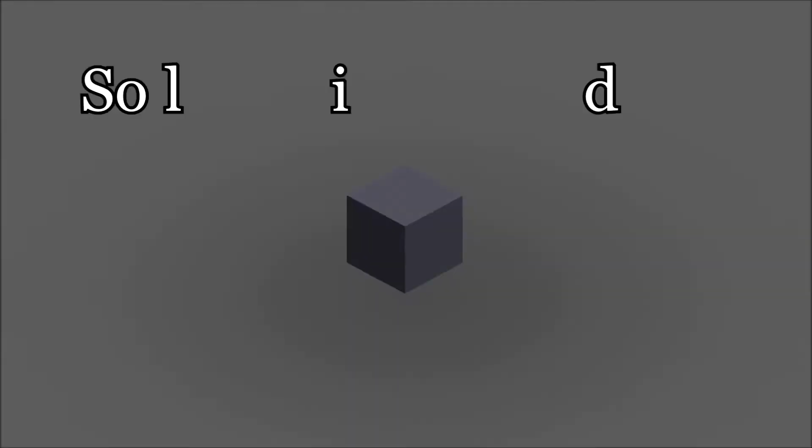In this lab exercise, you'll be creating an in-context part using Solidworks. You'll be creating the part shown in red, calling it the carriage. One interesting takeaway is that most of the dimensions, not all, but most, are the relation between parts. So you'll be converting entities, holes, locations, sizes, and so on between parts. All told, maybe there are a half a dozen dimensions you'll type in as numbers as we go along. There are two documents you'll want to refer to.

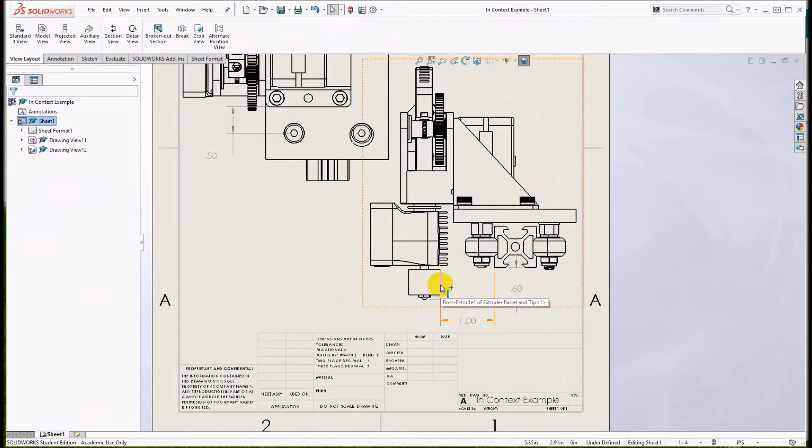One is the drawing that shows three of the relevant dimensions, with an end view. This depicts how far it is from the nozzle to the underside of the V-rail, and from the inside edge of the hot end to the front of the V-rail. Those are two of the dimensions. A couple of other dimensions are the distance from the edge of the mounting plate for the Titan extruder to the center point of these two rollers and the other pair of rollers on the bottom.

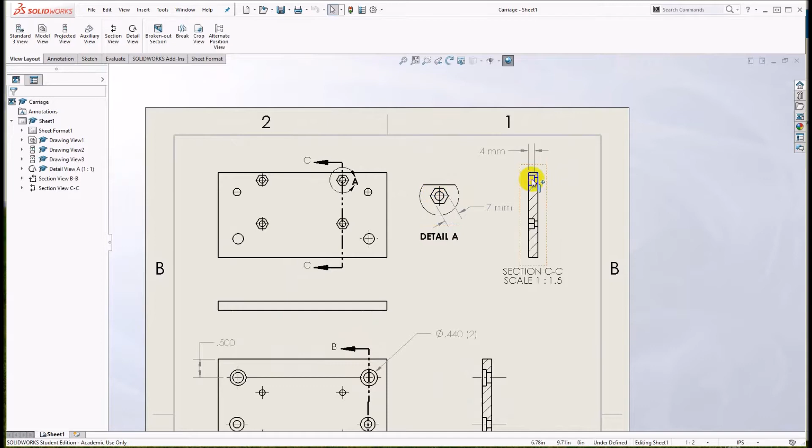So that's one document. The other document you'll want to refer to depicts some of the specifics of the carriage. Notice most of the dimensions are not here, but you do need a few, particularly when defining recesses for nuts. They're shown here, how deep they are, what the flat-to-flat dimension is. For the holes themselves, you'll want clearance around your hardware and to define the distance to the edge of the part you'll be creating, because those aren't really related specifically to any feature in the assembly.

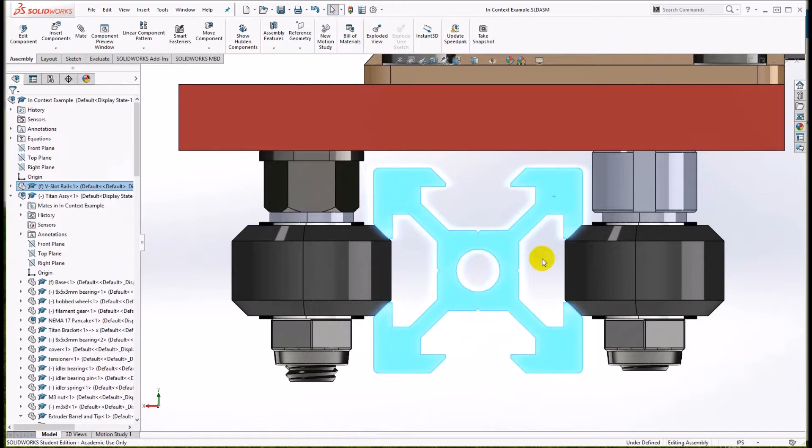So let's go back to the assembly and take a look at it. Just for introduction, you can see the rollers are quite well engaged in the V. I'll go to an end view so you can see it clearly, and here the rollers are tangent to and aligned with the V-rail or V-slot rail. In addition, the way this assembly is put together, the carriage is mobile, so you can move it back and forth, giving you a sense of, once you start developing your 3D printer, how things might interfere, where you can attach belts and the other parts. You'll find this to be a powerful way to move your design much further down the road.

Anyway, let's get started. I'm going to start with a brand new assembly, bring in many of these parts that are already pre-modeled for you. So your task, as I mentioned, is to create the carriage based on those other parts and the few dimensions that have been provided.

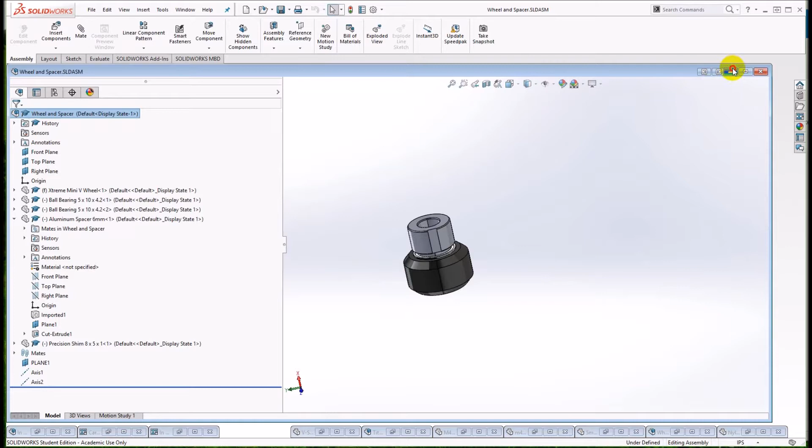As we get started, notice I have all of the relevant parts open, minimized down below. For instance, if I want to look at one of the parts, here's one of the wheels with spacers. I have everything open along the bottom, and the reason is it makes it easier later when inserting elements into my assembly to have them already present. I don't have to go hunting for them. So I'll do a File, New, Assembly, and OK.

The first part you put into an assembly is fixed in location. I think I'd like the V-slot rail to be that part. I'll place one of them there. Now we're ready to start adding things to it. The first thing I'll add is the extruder, the Titan assembly. Here it is, comes in just a random orientation, something we need to fix. Notice this part is movable, the other one is not, it's fixed in location. Let's start to relate the two together, and your guide for that is the documents that I provided.

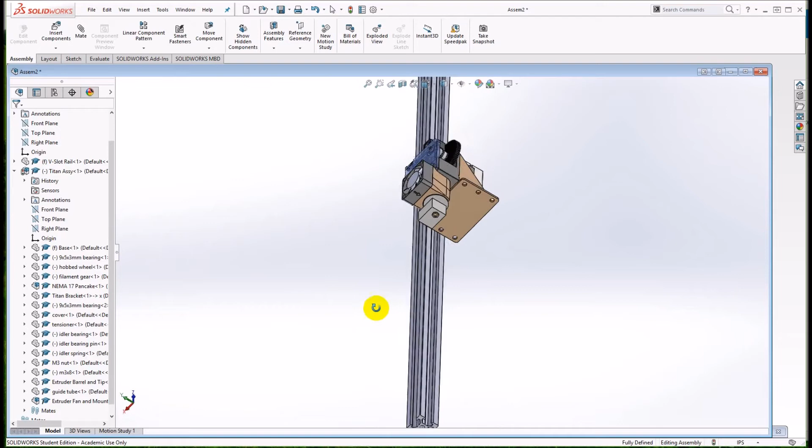For example, let's look at the in-context example sheet, and this shows a few of the key dimensions you'll need to use: 0.6 inches from the bottom of the V-rail to the tip of the extruder nozzle, and 1 inch from the inside edge or surface of the hot end to the front of the rail. So let's do that first.

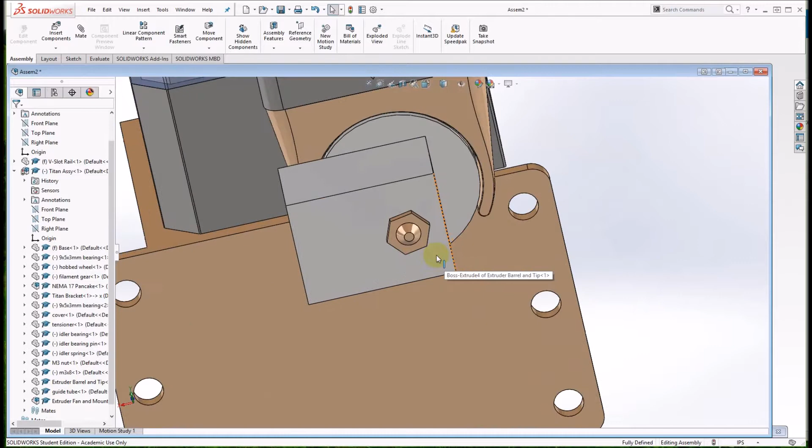Go back to my new assembly, I've got to find it here because I have quite a few things open. Alright, here we are, let's do the nozzle first. You can do it in any order you like. So I'll go up to Mate, click on the tip there. Let's define this as the bottom, so we'll align the two of them. They're backwards, so let's flip it around. What we want is for it to be 0.6 inches down. Right now it's 3 and change down from where it started out initially.

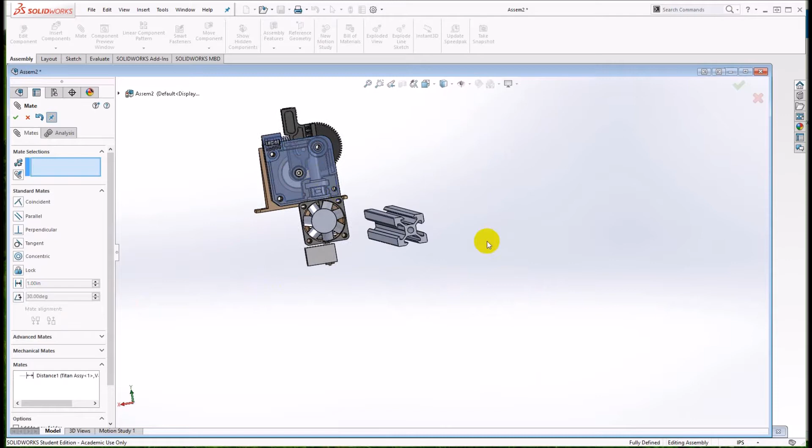I'll make it 0.6 inches. Sometimes when you are changing your flipping or adding the offset, it tries to readjust, so you'll have to be aware of that. Okay, I'll accept that change because that's one of the first things. And I'll move it manually such that it's roughly in the location I want it to be. Oops, let me hit my F. Things got a little spaced out there. Hit F again. Alright, so I'm back.

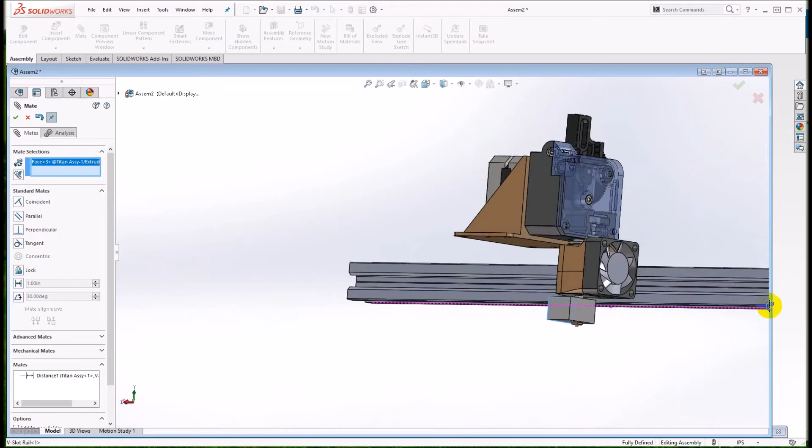So now I've actually achieved a fair bit right there. Now the extruder, the entire Titan assembly, is oriented such, and you'll see you can even move it. I mean, it acts as if it's a carriage already. Those two simple mates have already done a great deal of the work for us. So now we're ready to start adding the wheels and the other bits of hardware that will follow the constraints that I've just created.

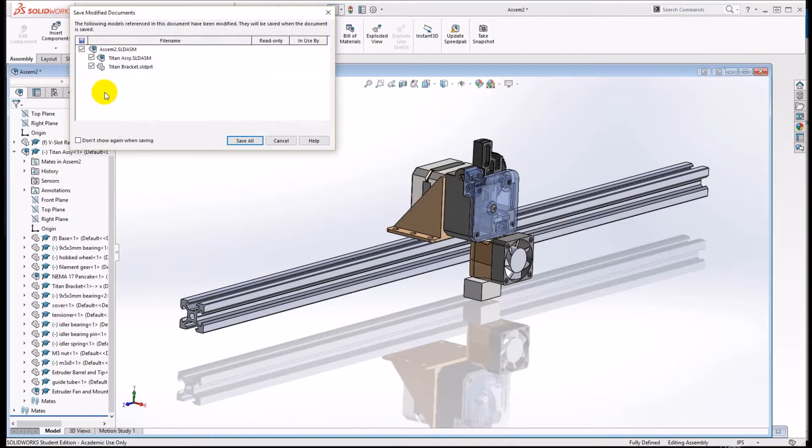Before we proceed any further, it's important for you to know that you have to save the assembly before you create any in-context features or relations. Otherwise, later on, when you do try to save the assembly, you will end up breaking those features. So let's go ahead and do a file save right now. I'll save it under a name, say for example in context 2.sldasm. So once having saved it, now it's safe to create in-context features, knowing that the assembly through which they relate to each other is stable and has a name that they can refer to.

Now that we've saved our assembly, let's start adding some of the parts that will become important as we move along. The first parts we'll add are the rollers or the wheels. We do an insert component. Let's find them down on the list here. There are 2 with the spacers and 2 with eccentrics. I will use the push pin to allow me to add more than 1 of each. So I'll click on the push pin, then we'll do 2 of the wheel and spacer, 1, 2, right click to finish. Same thing for the wheel with eccentrics. Click on it, push pin, 1, 2, right click to finish.

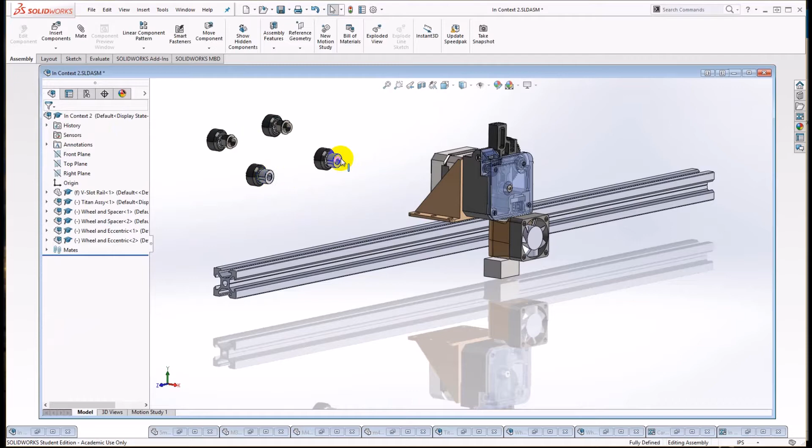Let's now turn on the visibility of planes so that we can see how things can get aligned to each other. The first task is to align the wheels to the rail. So we'll go to visibility, turn on plane visibility. Now you can see the various reference planes that I've created that will help us to align the wheels to the rail. Let's do the spacer wheels first. Get the orientation of the view just right. Okay, we'll go to Mate. Notice nothing is selected yet. Click on the plane of one of the wheels, the plane of the V-rail. That orients it. We'll accept that. Do the same thing with the second wheel.

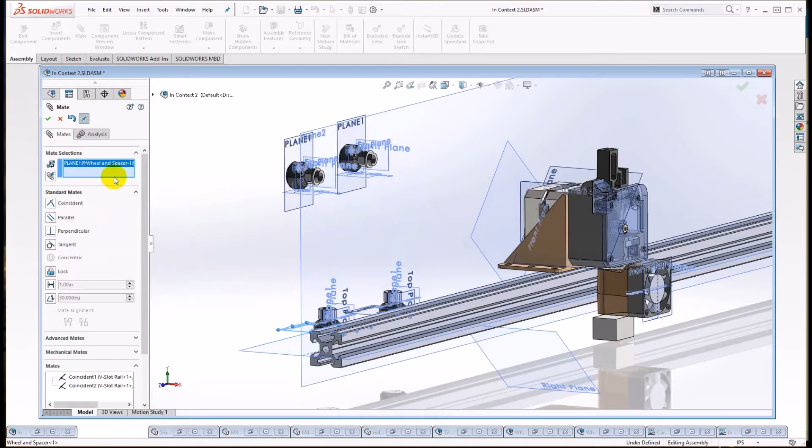Okay, they're good. Now they're on the wrong side of the rail. Let's move them over. I don't want to do that. Let's zoom in a little bit and select the wheel, move it through, move the other one through. Now they're in the right plane, but they're not touching the rail. Let's fix that. I'll find the V, the male V part of the roller, and mate it tangentially with the rail, like that. Do the same thing with the second roller. Let's get the right surface here. There we go. Accept it.

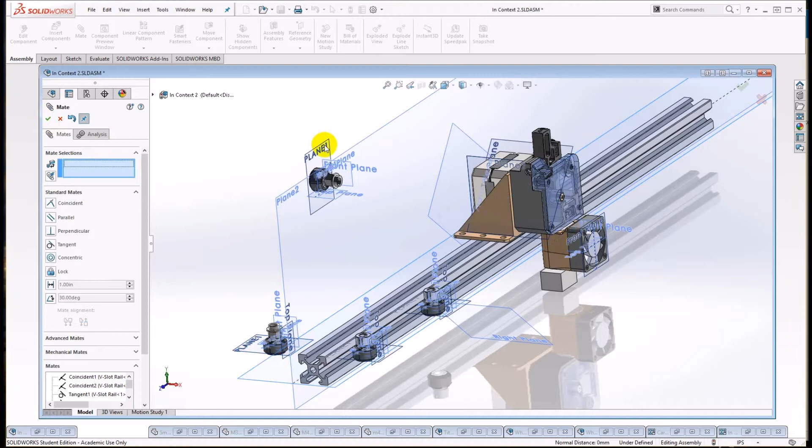Now we'll repeat those operations with the eccentric wheels. The plane of the wheel, the plane of the rail. Accept it. Second wheel, rail. Accept that. And again, to a tangential mate of the V with the V. Bring it in. Let's get this guy, zoom in a little bit. This surface, let's clean this up. I think I forgot to accept that one. Let's finish that. And we'll do this one to the V-rail. Don't forget to accept it as I did a moment ago.

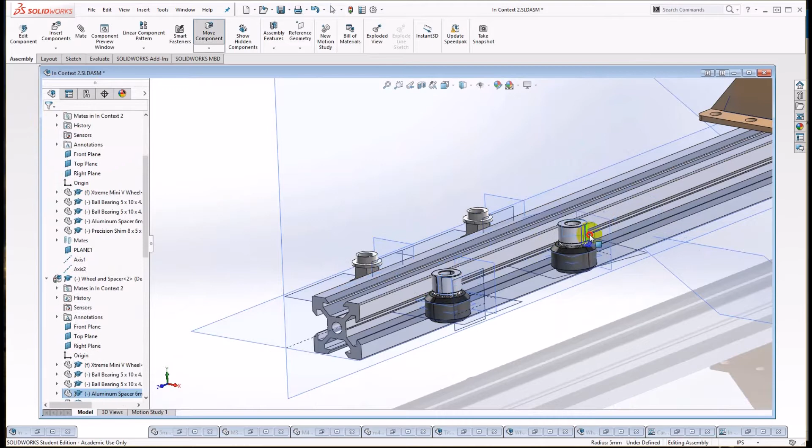Alright, so now all the rollers are properly mated with the V-rail. We'll have to do a little bit of extra work with the eccentrics in just a moment, but you'll notice that I can now move the rollers, all four of them, and they work. They'll rotate a little bit, but they stay properly tangential. In fact, if I look at the end view of the rail itself, let me see where I can select that.

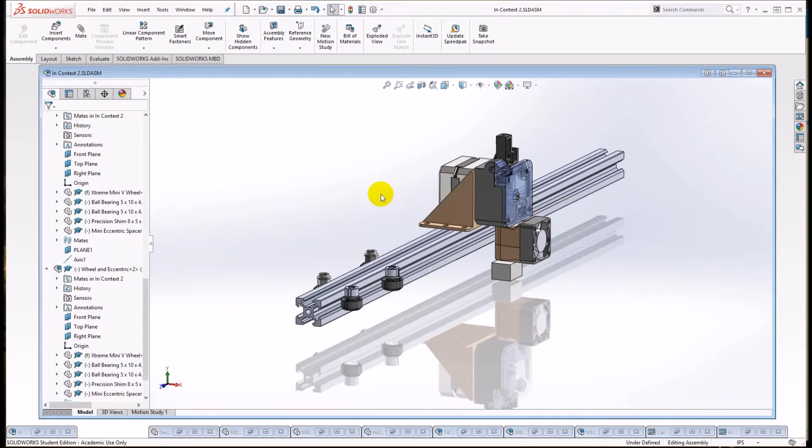There we go. We'll look at the end view and zoom in a little bit. You can see how nicely the rollers are now nestled into the V-grooves of the rail. This is good. Now we're ready to start defining the carriage itself. Let's turn off the plane visibility and once again save our assembly. We're going to rebuild and save, and now we know that there's no chance that we can lose the work that we've just done.

Now that the wheels are oriented to the V-grooves, let's align them according to our document to the carriage, to the bracket for the Titan extruder. Going back to our drawing, let's take a look here and see what the dimensioning is. This shows in the upper left view here, let me make it a little bit bigger, that the center of the rollers is to be a ½ inch from either side of the Titan bracket.

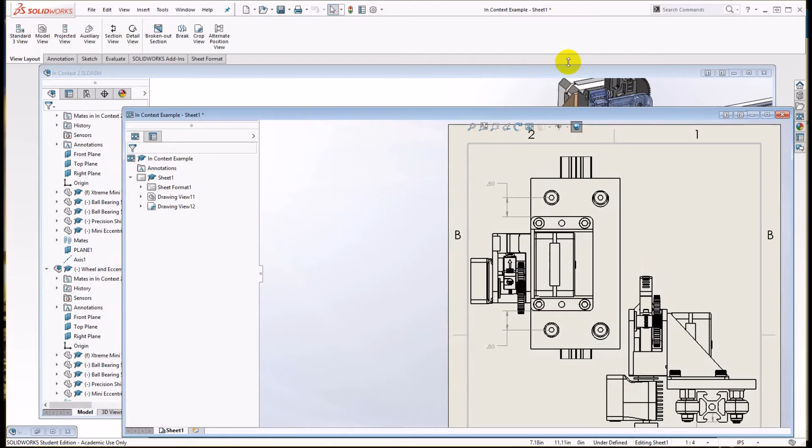So let's do that, in fact, in the assembly. We'll move things approximately to where they belong. That will help in a moment. Rotate the view around, do the same thing on the back. Get this oriented better. And I'm just kind of moving them lazily to a location that would help the job. Zoom in a little bit.

Now, as before, when we were looking at planes, we can also turn on visibility of the axes, and we can use those axes as dimensions from the edge of this bracket. So let's do that. We'll mate the axis with the surface, and we'll give it an offset of a ½ inch, 0.5, which is what was specified in the document. We'll accept that. Do the same thing for the other in the back.

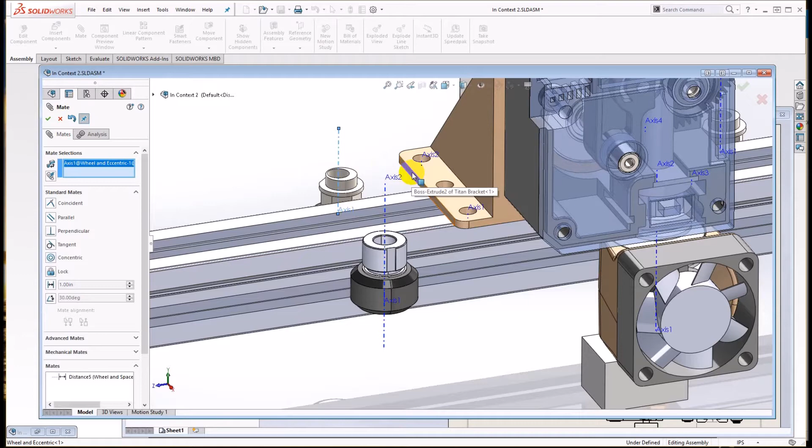½ inch. Now, for those more practiced in Solidworks, you can actually create a global variable and have it relate automatically. That would allow you to change that dimension and have it affect all four wheels at the same time. We're not doing that in this example. So here again, that to here, an offset of 0.5, accept it, and here to here.

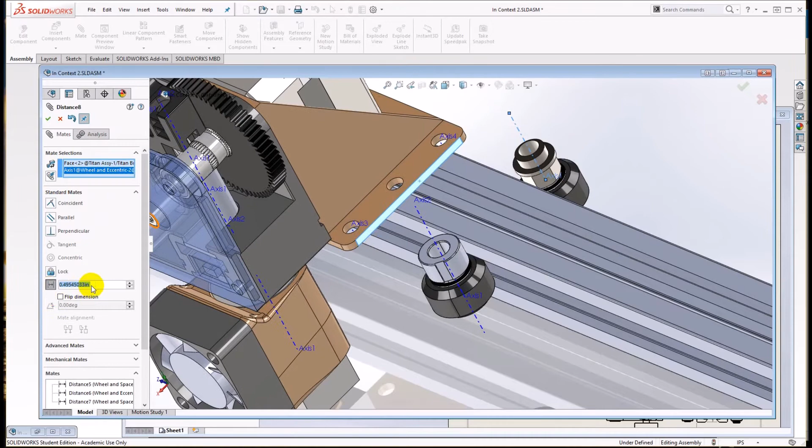Let's get the clear selection, got to get it right. Axis to the surface. Oh, I see, it's selecting the axis there. Alright, clear it out. I'm leaving this in the video because it's the kind of thing you'll fight with occasionally. When I was clicking here, it was trying to select that axis. Let's get away from that axis. Here to here. Make them coincident, and then offset by a ½ inch, 0.5. Okay. Now we're correctly oriented.

Sometimes it's valuable to be able to understand why Solidworks isn't doing what you want. This was a good example. We'll accept that. And now when I'm finished with this, as I move the entire assembly, notice that the wheels travel along with it. I mentioned earlier that I want the eccentrics to be oriented in a particular way. And let's study for a minute. I'll turn off the axis view.

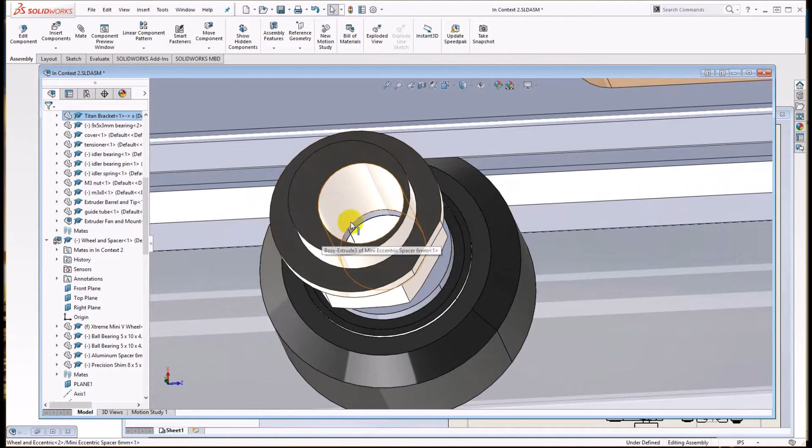Let's study the eccentric and notice that the lobe, if you will, the eccentricity is oriented away from that flat. So the extreme eccentric property is the furthest from this particular flat. And what I'd like to do is have the carriage that we're going to design in just a moment be such that the two eccentrics are halfway through their travel. So if I turn it in one direction, I'm moving away from the rail, and toward the rail in the other direction, and equally for both wheels.

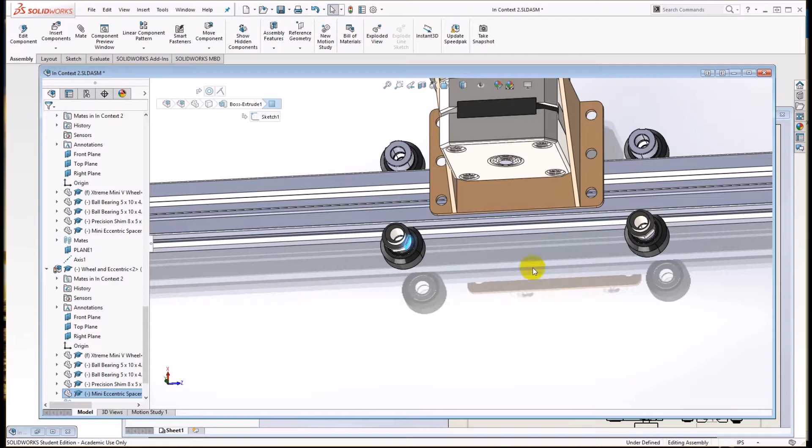So let's do some alignment of these flats to the rail, and that will ensure that my carriage, once I create it, will have that property. I'm going to click away from everything, clear them out, and then go into a fresh mate, and I'm going to mate that flat with the surface of the rail. Initially it tries to do it parallel, which is not what I want. I want to have equal up and down adjustment, so I'll make it perpendicular. That's just right. Now if I were to turn the eccentric one way, it moves the wheel away, and the other way it moves it closer.

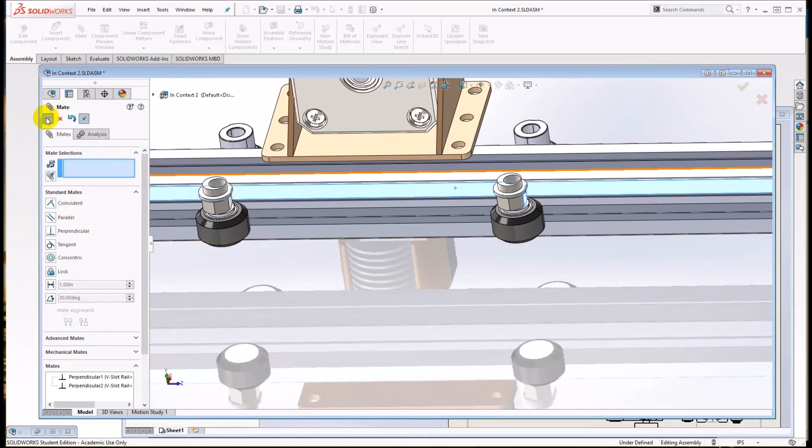Let's do the same thing for the other. Again, choosing the correct flat, I'll choose this guy here. And again, the face of the rail, let's get the right face here. Starts off parallel, we'll make it perpendicular. And now the wheels are not only spaced as one would want, as per the document, from the bracket of the extruder, they're oriented such that I get the best advantage of the behavior of the eccentric. So the next step is finally we're going to start creating the carriage.

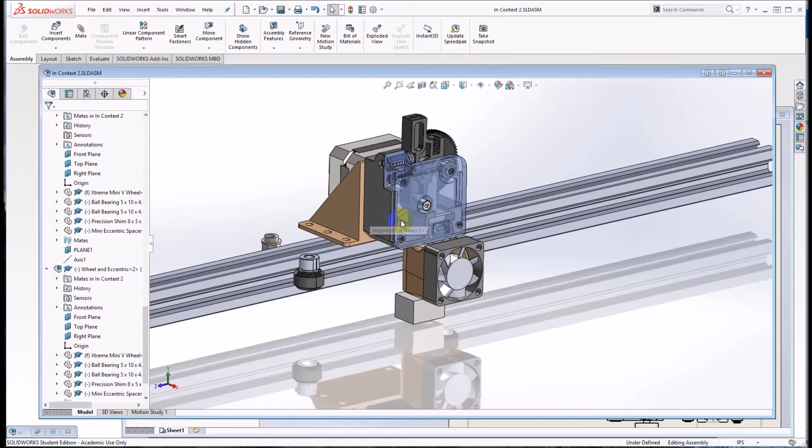Alright, before we proceed any further, let's do another file save to preserve what we've done. Now let's fast forward and start to create the carriage, the reason we're here. Point one thing out, I want you to look briefly at the parts that the carriage will be mating to.

They'll be supported on the bottom by the flat surface here, the top here on each of the kinds of rollers, and the top of this carriage plate will be just underneath the underside of the mounting plate for the extruder. So those are my constraints. Let's start with a simple part that will mate up with all of those features.

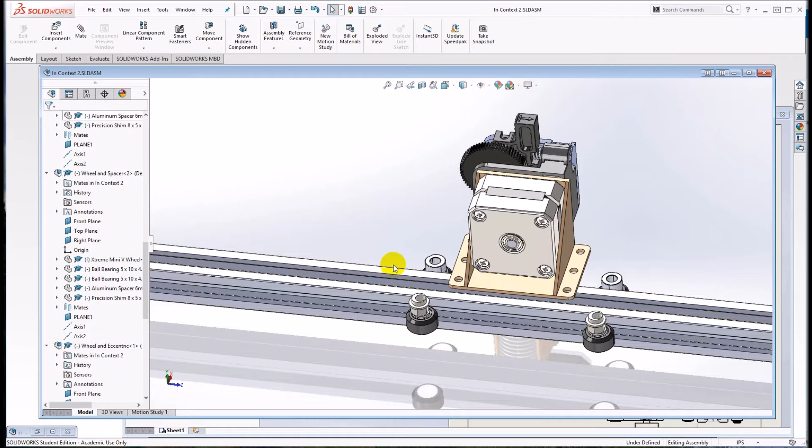So for the first time, we're going to create a new part within the assembly. All of this preparation about to come to fruition. So up on Insert Components, you click on the down arrow and you say New Part. And the surface that I'm going to use as the reference surface is the underside of the extruder carriage, extruder mounting plate.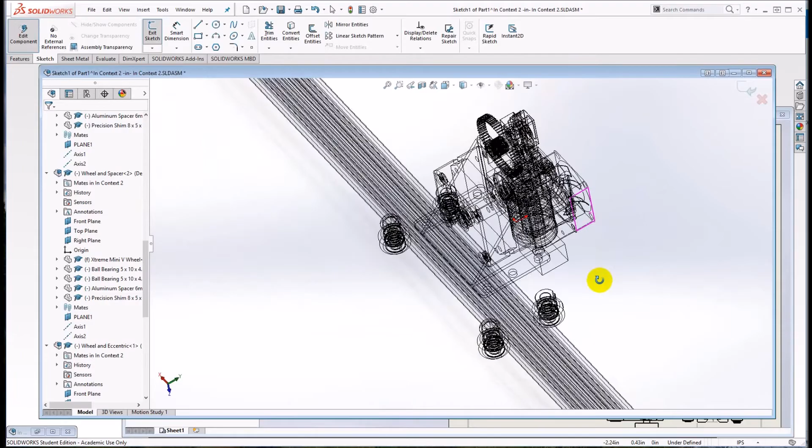Now notice when I'm beginning to create things, it reverts over to the wireframe view. It's something you have to get used to, and sometimes it helps a little bit to rotate or move the view a little bit to refresh your mind in terms of what's where. We're now drawing a sketch on the underside here of that bracket, and we're going to draw it out large enough to encompass the four wheels.

Down here in the feature tree, you'll see that there's a new part, this is the part that we're creating. It's in blue. That's your clue that this is the thing we're currently editing. So we're in a sketch. It starts out in a sketch. Let's just draw a rectangle. We're not going to get too particular about it, but we'll make it big enough, and then we can constrain it as we need to.

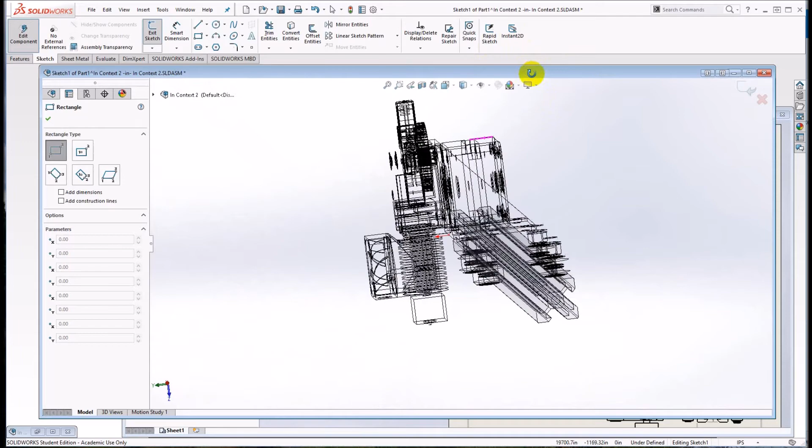So corner rectangle, we'll start somewhere. In fact, I know right away that I want it to be in alignment. I'm going to rotate my view a little bit. I want it to be in alignment with this edge of the bracket. See that line right there? If I pause briefly on that and then move out, notice it tries to help me. So I'm going to move out here, click and drag, and I'm going to drag in such a way that it encompasses everything that I need it to cover.

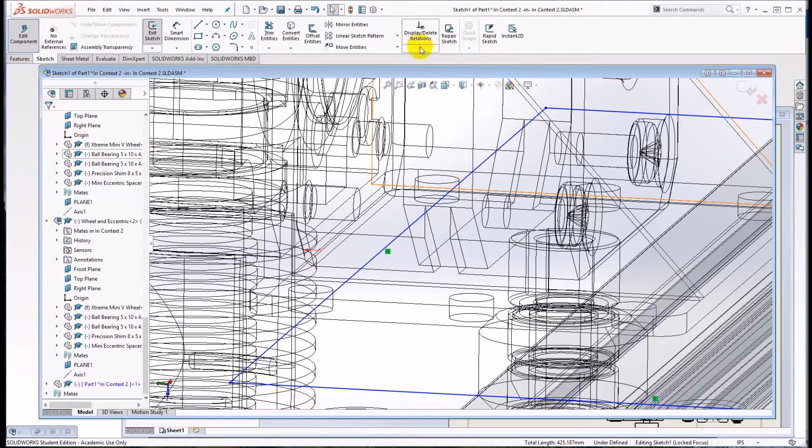Well, it looks like I didn't go exactly right, so that's okay. I'll drag my edges around a little bit, and in doing so it became unaligned. So let's do our first relation. We're going to add a relation right here. You see where it says relation? Add relation between that line, and let's make sure we get the right edge. I want it to be related to this right here, and I'm going to make them collinear. So that's my front edge. That's the first parametric relationship that we've created.

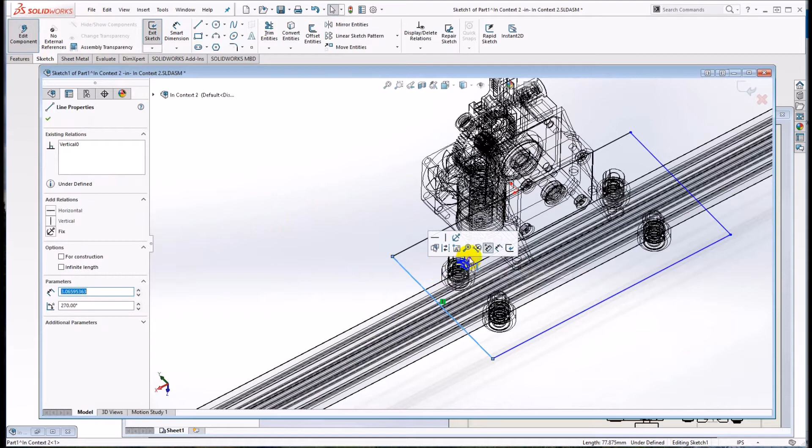Let's continue the process. I'm going to add another relation. In fact, this one will be a dimension. Under Sketch, Smart Dimension, and I'm going to dimension from, now pick one of these circles. Remember, we're going from this to the outer edge. So we can start with the edge to that circle, edge to circle, and notice it's picking the center of the circle. That's the default behavior of SolidWorks.

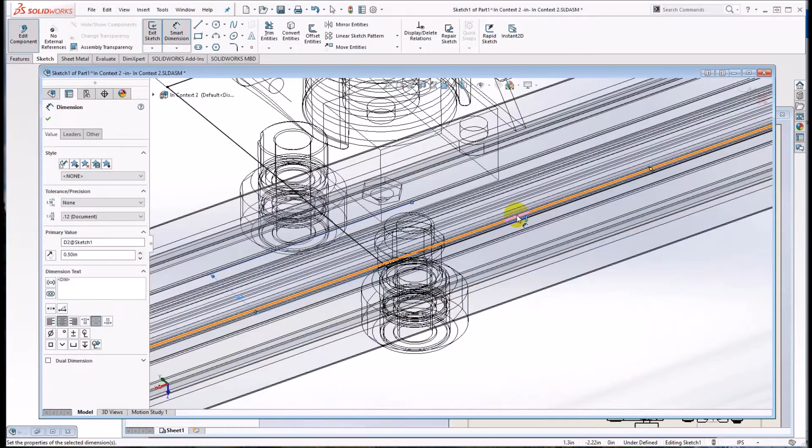So I'm going to make this a 1/2 inch, 0.5, just as per the specification. I'll accept that. I'll do some more dimensioning from here again to the center of this guy. I'll make that again 0.5. So now if you observe, my rectangle is starting to come into proper location and size. I'll accept that, and I can go ahead and repeat that same thing on the other side. There are relations that I can create that would help it be a little more automated, but I'm not going to do that right now.

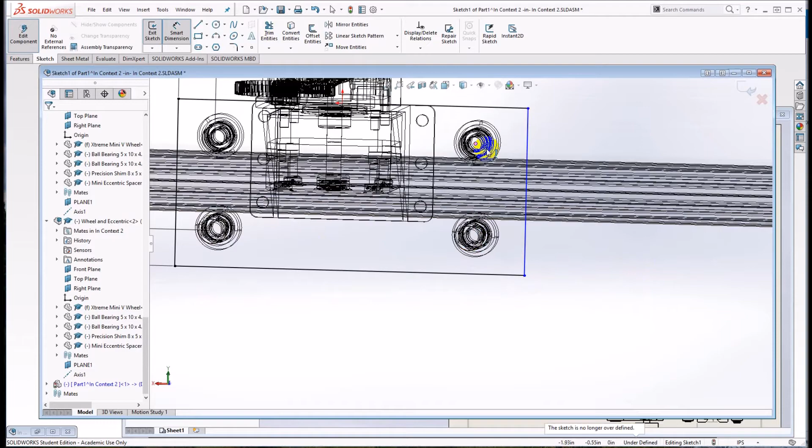Let's do some more dimensioning from here to this circle here. It's already a 1/2 inch. Well, I wonder why. It's because those two wheels are already aligned because of their relation to the rail. So I didn't have to do that one, but I do have to do from here to here because that's not already predefined. So it's 0.75, make it 0.5, and now I'll accept that.

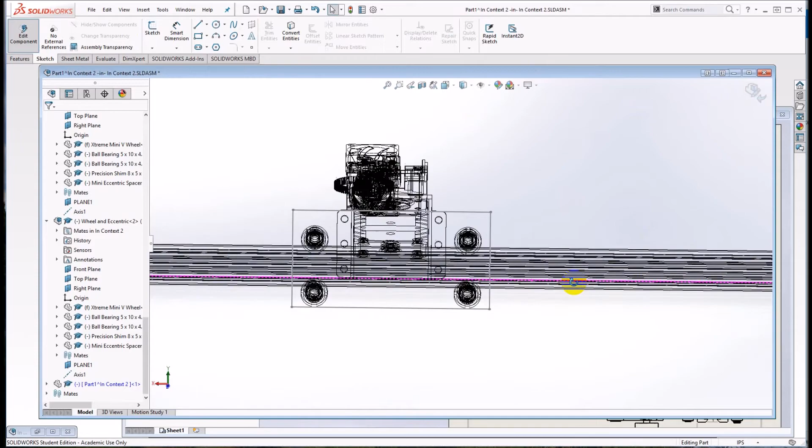I will exit the sketch. We'll come back into it in a minute, but I want you to see how we get this to be the right height for what we're needing to do. So all we've created is a sketch. In fact, if you open up the feature tree, the only thing present is that one sketch.

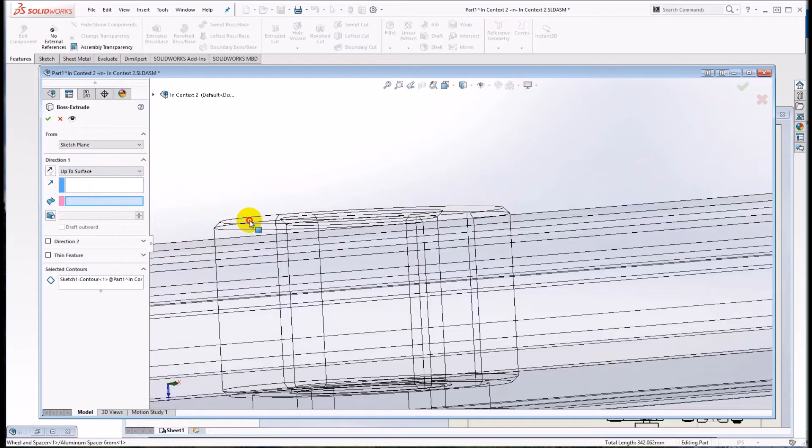Let's add a feature. Go over to Features, Extruded Boss Base. We're going to extrude this sketch. Well, how far do we want to extrude it? We want it to go down to the top of, remember what we pointed out earlier, the top of this guy right here. So we're going to go up to Surface, click on that surface, accept it.

So now if I exit this part altogether, here I am with the beginning of a carriage. And if I move this thing, it moves. Now we're starting to really look like something. Let's start to blow some holes through this. That will make life much easier and make us able to actually mount these parts. Right now it's just a big old rectangle.

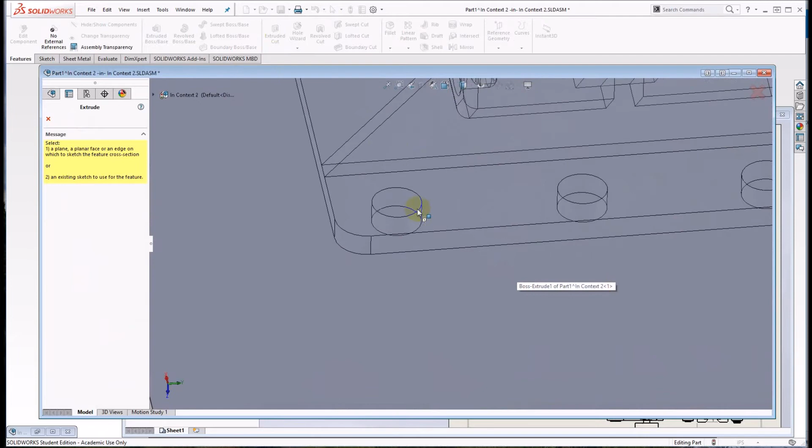So again, we'll go edit the part. We're going to edit right in context. We're going to do an extruded cut. Well, what are we going to cut? First of all, we want to cut for the 4 corner holes for mounting the extruder bracket. So we're going to convert entities.

And sometimes when you want to convert entities, I really want to convert that circle and this one over here, but it's not allowing me to select them. Instead, what you do is you go up to Display Style and tell it you want a wireframe. Having done that, now look, I can select that one, that one. Let's do them all. Let's do the 4 corners. I want those to go through, that one, this one here.

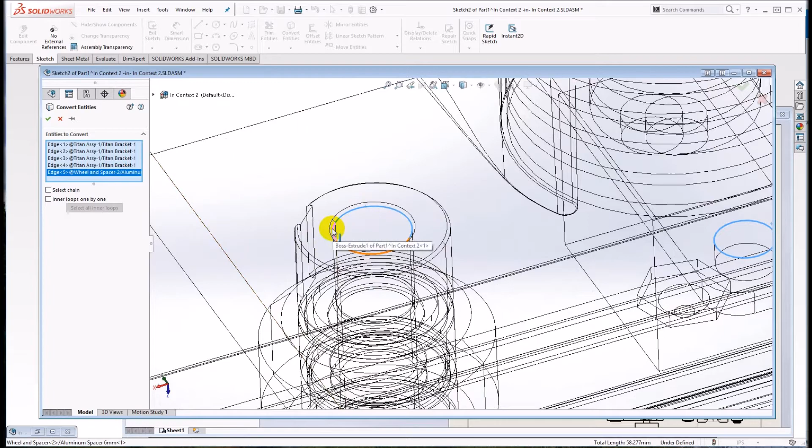Now what do I want to send through from down here? I just need a hole for the screw, so I'll click on that. Now this is in halves, so make sure you do both halves. Those two, same thing here, these two. Now the eccentric's a little bit different. I want the outer part of the eccentric boss to be what the hole will be made for. So this guy and this one.

Okay, they're converted. I'll accept that, and there they are. There's my 4 circles. Now I'm still in the sketch. I haven't told it what to do yet. I'm going to exit the sketch, but before I do so, let's go back to the standard display like this. Makes it a little easier to see what's going on. So I'll exit the sketch, and I'm in Cut Extrude. Remember, that's how we started all of this.

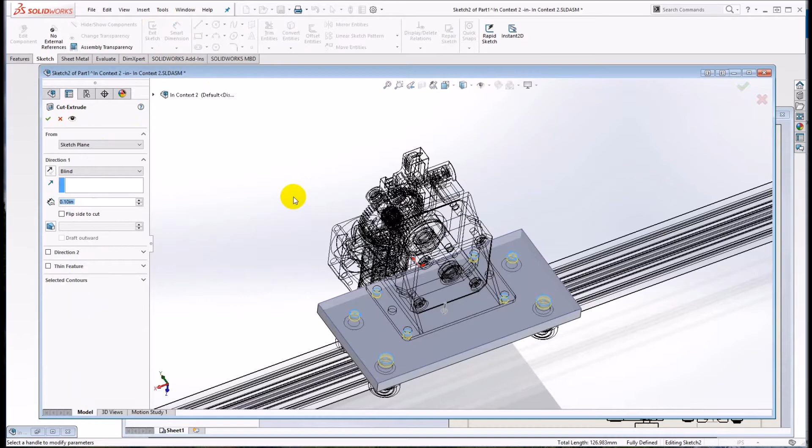We're in Cut Extrude. I want these holes to go all the way through. So I will say through all, accept it, and now I have holes in the places where I need them. Notice that the eccentrics are resting inside of them, and that I have a hole for the screw for the fixed wheels, the wheels with spacers. Not to mention I've started to make the holes for the screws that hold the extruder in place.

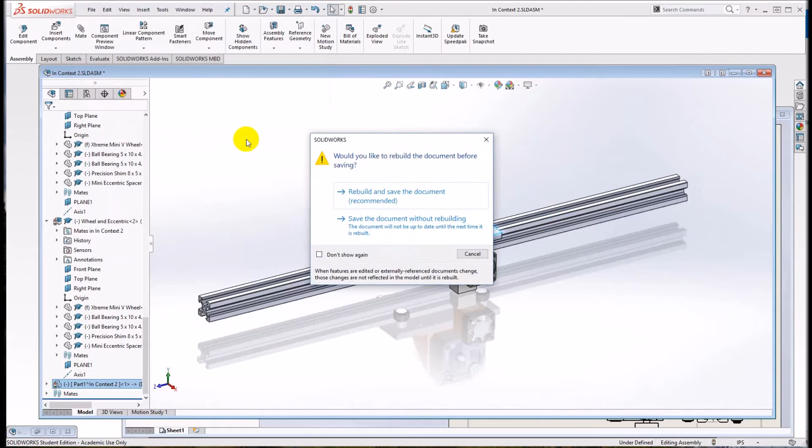So we're going to stop here, take a look at what we've created, and when we come back in just a moment, we'll be cutting out a little more detail that allows the hardware to function the way it is supposed to. Before I leave, let me do a file save, save all. Yes, I want to rebuild.

And now I bumped into not an error so much, but a thing that you may forget to do. I certainly did forget to do it myself. It wants to know, what do you want to do with that new thing that you created? Do you want to save it inside the assembly or externally? You know what? I want to save it externally, but I want to do it my way. So I'm going to cancel out of this.

Nothing's been saved yet. Let's go back to the feature tree and let's find that part. This is it right here. Right now it's named Part 1 in Context. Well, not the handiest name. Let's do a save part in external file. Now the way you get there, you right click, save part in external file. I'm going to click here and give it a name.

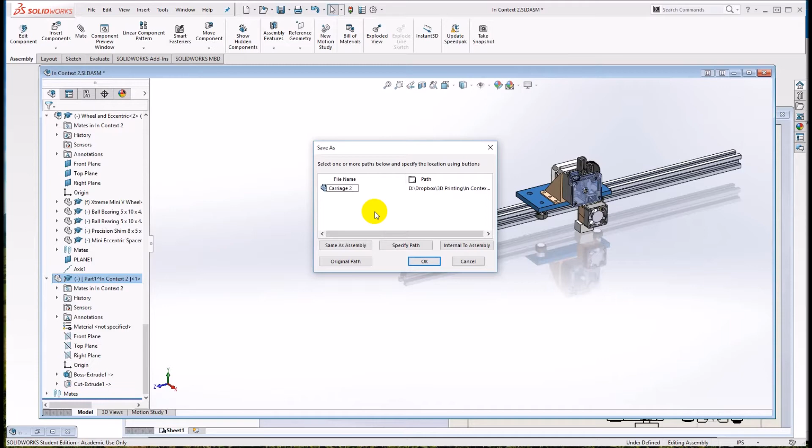I'm going to call it carriage 2 so it won't conflict with the one I created earlier. And I'll say OK. And now it knows that, even though it has references into this assembly, it's to be saved as a standalone part. As a matter of fact, I can right click and open it all by itself and look at it. So if there are things I want to do that aren't necessarily in context, there it is, ready to be worked upon. So I'm going to close this.

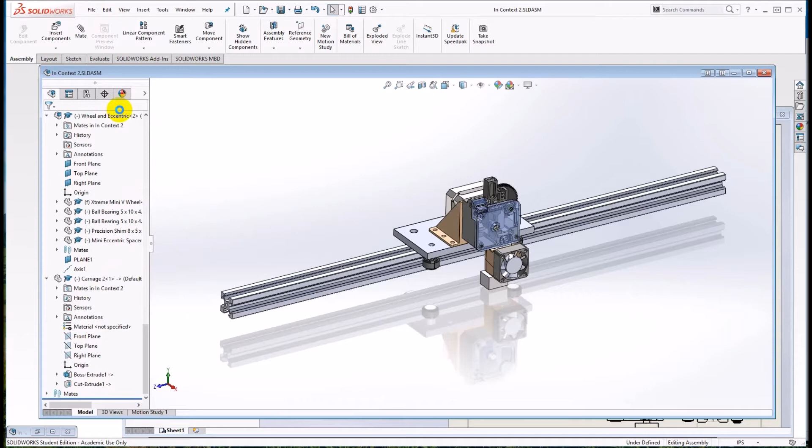I'll go back to my assembly. Remember, I hadn't finished saving it yet. I'll do a File, Save. In fact, let's do a File, Save All to make sure I don't have anything left out. Okay, and when that finishes, we know that all of the work that we've done to this point is preserved. It moves nicely. The carriage is looking partly developed, and we'll be back in just a moment.

Now that we have the through holes for the various hardware, let's create the recesses for the screw heads on the top and the recesses for the captive nuts on the bottom. Let's do the screw head recesses first. Let's see what size they want to be. Go over to the provided document.

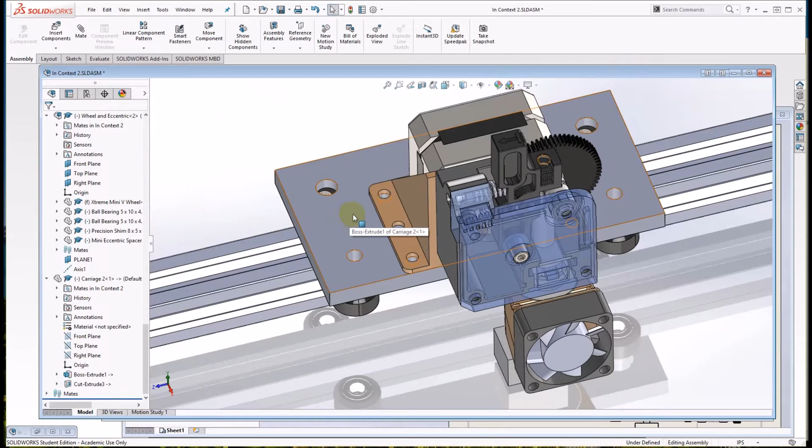Now the holes for the fixed wheels are to be 0.38 inches in diameter. The recesses for the eccentric wheels to be 0.44. So 0.38 and 0.44. We'll come back to here in a moment to get the depth. So we're going to go into editing the part. We'll create an extruded cut on the top surface.

Draw a circle. Notice it helps me find the center. We drag out, dimension it, 0.38. Do the same thing over here. Again, a circle. 0.38. Now in the next one I'm going to do a little bit differently. I'll show you. First of all, we want the 0.44 centered on the current hole. That way the screw head will have room for its transit throughout the eccentric travel.

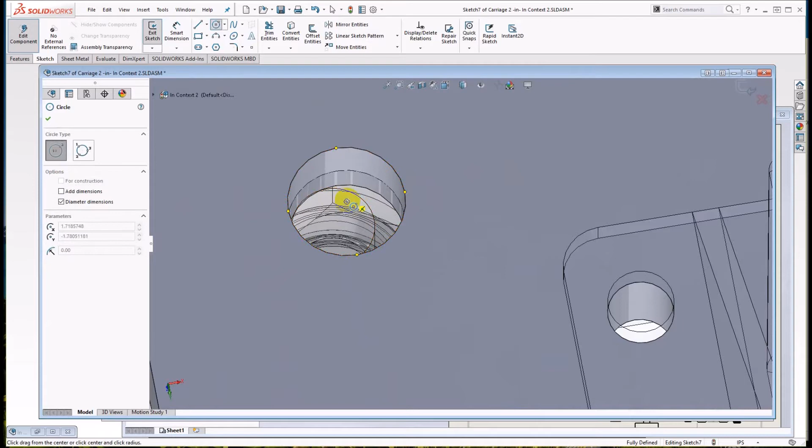So again, a circle centered there. Got to make sure we get the right center. We don't want the center of the guy down below. We want the center of the upper hole, the through hole, and this will be dimensioned at 0.44. We'll accept that dimension. This other circle we're going to do a little bit differently. Same kind of drawing technique. Again, we'll find the correct center,

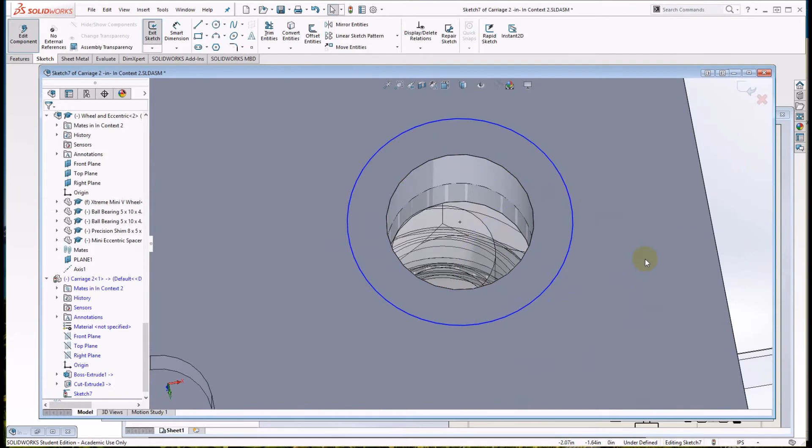draw it out, but instead of typing in a dimension, when we're doing the dimension entry, we'll go over to the dimension for its partner, double click on that, and accept it. And that way it becomes parametric. So in this case, if I want to change the diameter of both, I would change the source, the one over here. Here you can see it is a copy. And in fact, when I'm done, that will be the same diameter. Okay, let's exit out of the sketch.

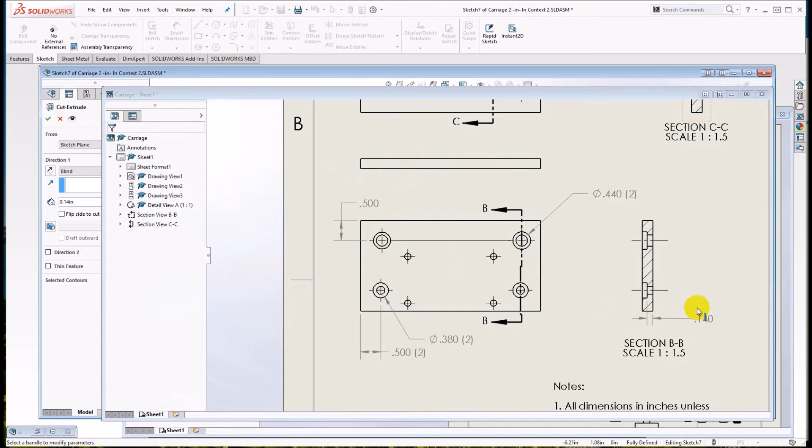We're ready to do some extrude cut. We'll go back to that dimensioning again. Let's see what the dimension ought to be. We want to go, as you see over here, 0.14 inches from the far side. So we're going to extrude cut and offset from a surface. And the surface in question is the underside. And we're going to punch in 0.14. It happens to already be there. Okay, and we'll let it do it.

So now I have the recesses in place for the screw heads. I've finished the top surface. Let's do a save, and then we'll come back and do the underside for the recesses for the nuts. Now the holes for the bracket are already placed, so we don't need to worry about them being out of position. Now it's kind of hard to get to the holes that we want to from below. Two of them are visible, but two are hidden up underneath that rail. You can't even really see them here.

To make things a little bit easier, let's open up this new carriage part separately. So I'll right click and I'll open it as a separate part. And you can see, there's my top. Look at the recesses. On the bottom for each of those four holes, I want to have yet another recess which is designed for the four hex nuts, the M4 nuts. Let's take a look at what those dimensions want to be before we go any further. Again, we'll go back to that same carriage drawing.

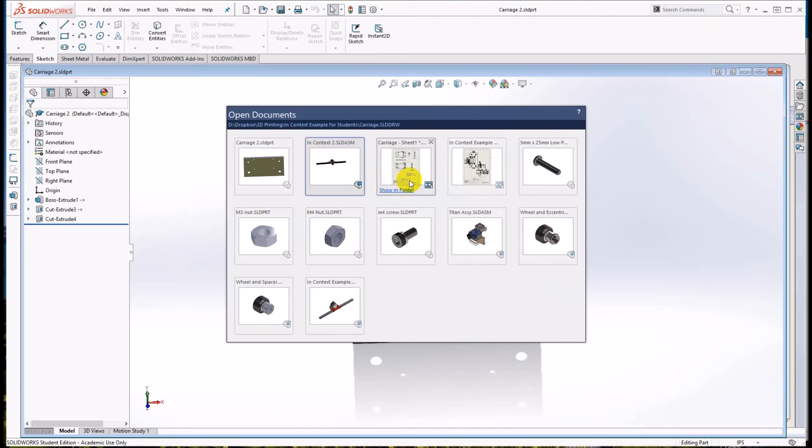And if you look up here, it's a 7mm flat to flat, and the recess is 4mm deep. Now it's not offset from the surface anymore, it's just a plain old 4mm deep. So 7mm across flat, 4mm, and notice the orientation. The top and bottom flats are parallel with the top and bottom surfaces. That's to give the maximum room or beef right around here. If you had the pointed part here, it'd be getting kind of thin. So alright, 7 and 4. So we'll go back to the carriage part and we're going to create those recesses now.

So here we go. Feature, extruded cut, this surface. And we're going to create 4 hexagonal shapes using the polygon. So the polygon, we'll center it on here. Orientation, I don't care right now. We'll do all 4. 1, 2, 3, and 4. Let's dimension them across the flats. 7. Now we're in inch mode, so you'll have to punch in mm. So 7 mm. Same thing here and here.

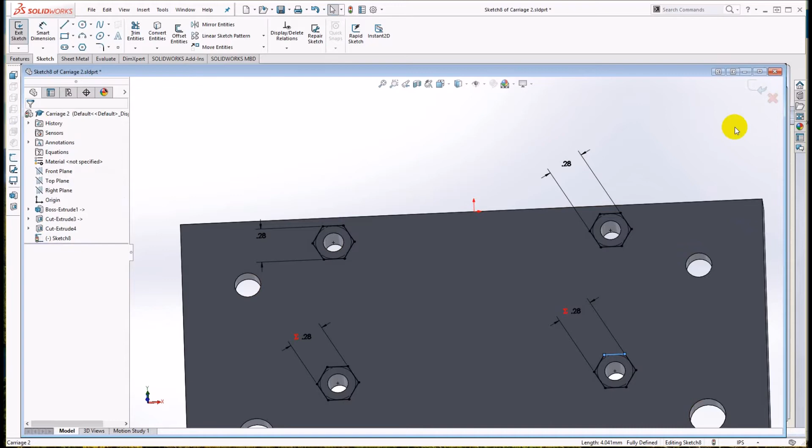Now remember, from the drawing we're going to go down 4 millimeters, so up 4mm, that's the depth of each of them. And there are the holes now for the nuts, the captive nuts, to be inserted. So if we go back to our top level assembly, you can see that in fact there are now holes for the nuts.

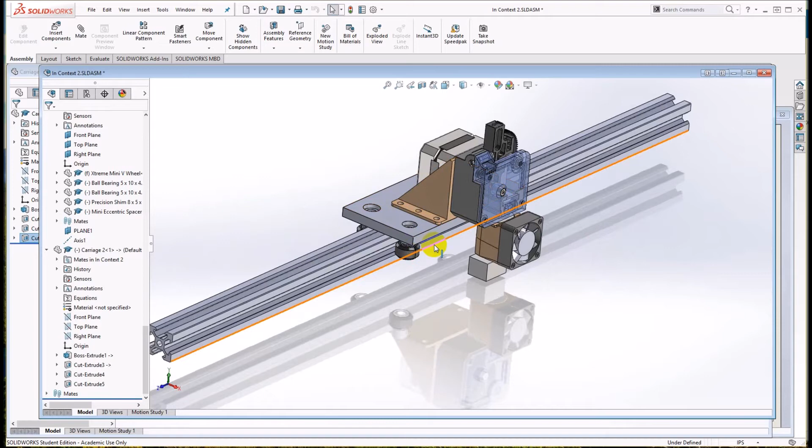That's kind of the end of the design, but what I'd like to do, I want to make sure you all get in the habit of adding your hardware. There's nothing like adding a screw to a hole and finding out that the hole is too close to an edge, and even though it's in the right place, the head bumps into something. So in the next step, we're going to add in all of our hardware, and there is some nice automation that we can use to do that as quickly as possible.

So we'll go ahead and file, save all.

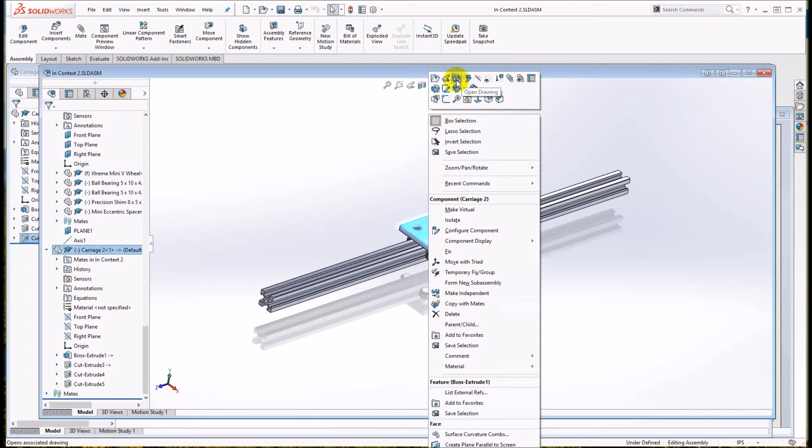This might also be an apt moment to change the color of the carriage you've created. Once it's finished saving, I'm going to go back into this part and open it. Let's change the base color, I'll make it different than my earlier one so it can be easily distinguished. I'll right click on it, go to the appearances dialog, click on that icon, click on the body, and we're going to change it to a green. There's a nice lime green.

So now when we go back to our assembly, it should be green, and that distinguishes it from the one I was working on earlier. You can make yours any color you want. So we'll again do a file, save all, and we're ready now to incorporate all of the hardware.

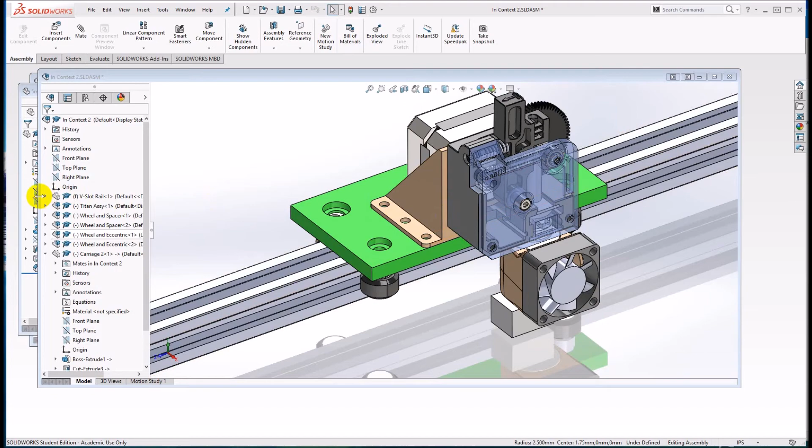Well, it looks like we're finally ready to add the hardware to this assembly. Thankfully, SolidWorks has some automation you can use. It's not perfect, but after some practice you can get used to using it, and it can be a good time saver. Right now I have the assembly open in front of me, and I also have the various bits of hardware on the left. There's a reason for that - I'm going to be dragging from one to the other.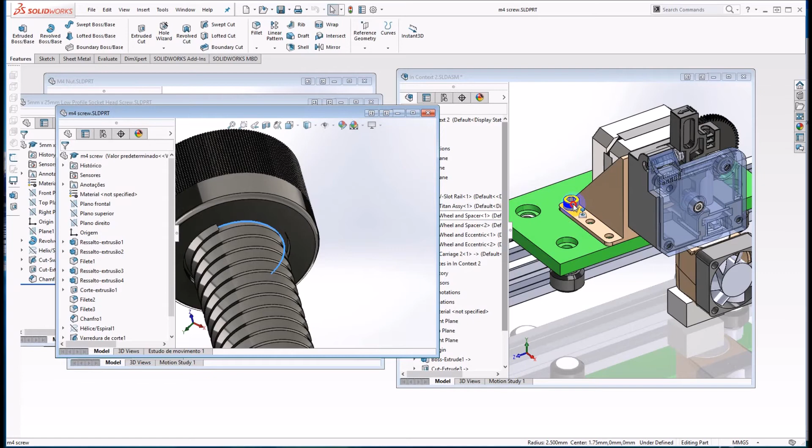Let's start with the M4 screws. Let me see if I can find them here in the pile. There they are. I want to try to drag this M4 screw into the holes in the extruder bracket. The way you start that is you find a circular feature at the base, like here in the screw, and you click on that and drag it over, and you find a spot where SolidWorks guesses correctly where it belongs, and I release, and there it is.

Boy, did that save a lot of work. I'll do it again for the next one. Okay, let it settle for a moment, then I'll rotate around and I'll do it in the other two corners. One, and two. Okay, so those screws are in.

We'll do the nuts in a moment. Now let's insert the M5 screws that are for the rollers, for the wheels. So here we go, let's again find an edge, for example right here. You've got to move very carefully and click on it, and now drag it into position. And if you... oh boy, sometimes it fights you a little bit.

You know, it just doesn't seem to be working. That's okay, give up for a moment. Go back, select, try a different edge. There, that worked. Make sure it's at the right height. It's not perfect, but once you get it going, like I said, it's a big time saver. Let's go back and do the same thing over here.

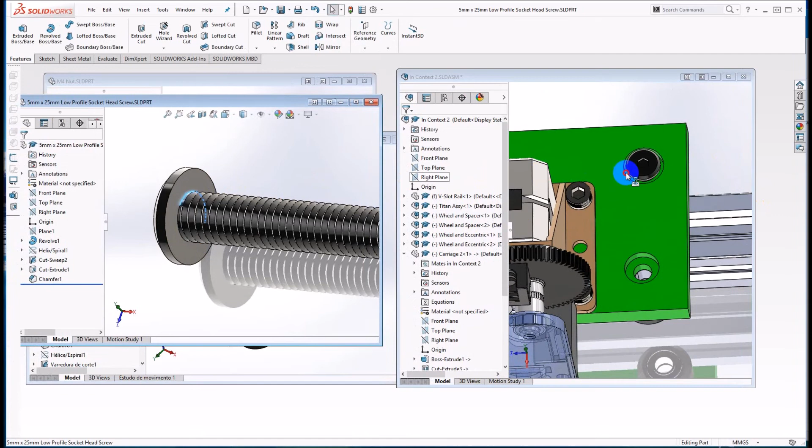Okay, now I have a feeling this one's in the wrong place. See, it's centered on the hole and it should be eccentric. So we'll go back, we'll redo that one. It's easy for SolidWorks to guess wrong.

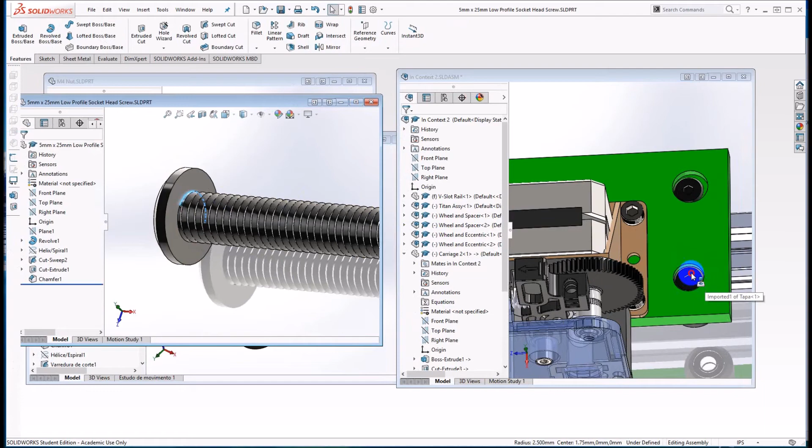This one can't guess wrong because it's not eccentric. Let's go back and fix this other one. Notice that it's centered, and it really shouldn't be. So I'm going to right click on that, delete it, get rid of it, and we'll do it over again, hopefully more successfully this time.

Grab the screw, get into position. That one doesn't want to do it again—something about that other side. So we'll grab this and let's see if we can find the eccentric. There it is, that's the right location. Notice it's eccentrically oriented to the side, so as I turn the eccentric, that will move around in its travel. Good, the two eccentric screws are in.

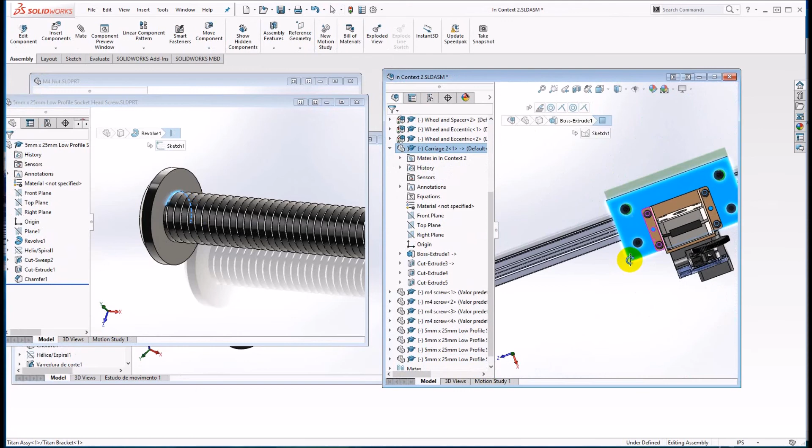Now I need to add the nuts on the other side. I'll minimize this, get rid of them—we're done with the screws, let's go over to the nuts. Let's find the M5 nut, nylon insert hex nut. There it is—that, not there—let's go back, this guy. I'm going to size that up a little bit.

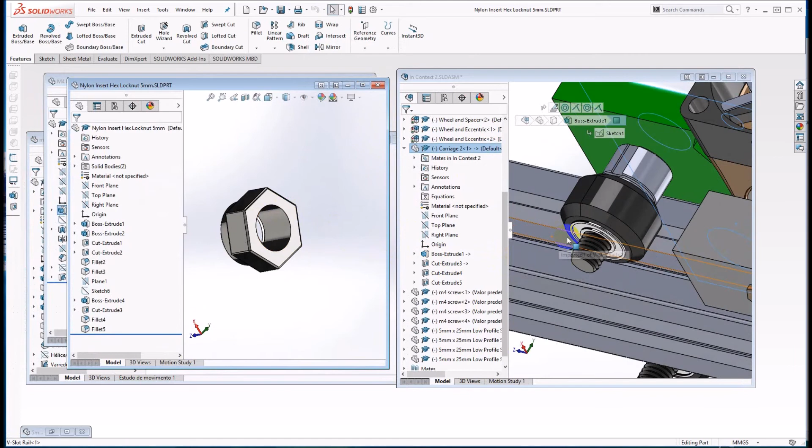This goes on the underside of each of the 4 rollers, and they have a nylon locking feature in them. I want to grab, just like with the screws, an edge, and put it to an edge over here. I'll grab this edge, drag it in, and once it's in place, drop it, let go, unclick. Do it again over here—same thing, grab this, let Solidworks find it. Okay, I got 2 of them.

One more time. There—you've got to move around a little bit and find the right location. Got one more of these to do. Okay, so now I have my 4 wheel nuts on. Let's do a file save because I don't want to lose my work there.

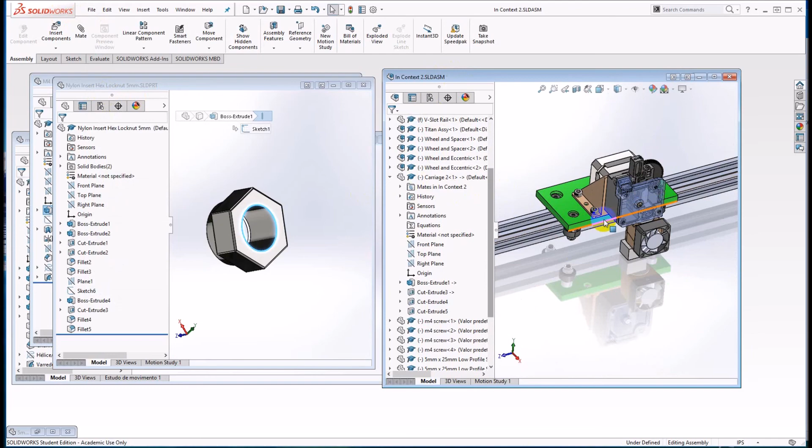Last but not least, we will insert the nuts for the extruder bracket—those are the M4 nuts right there. These are a little fussier because the automated feature doesn't know anything about flats, so they'll come in at some orientation, and then we'll have to turn them to align them to the flats in the recesses.

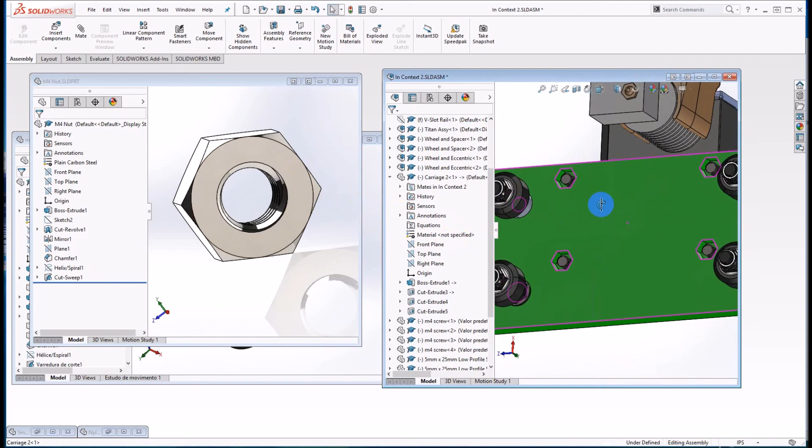Can't see the other two. That's easy to remedy—I'll right click on the rail and hide it for just a moment. Now it's still there, but hidden. Let's go back and do the same thing again, zoom in on one of these. Got to get the nut settled into the hole. We'll find an edge, drag it in. Okay, that looks about right. Notice it's not oriented right, but at least it's at the right depth.

Go do the same thing for the other 3. May not have grabbed it quite right—moving around a little bit there. Did that get it? Let's see—nope, it's too high, so I'm going to delete that and do it again.

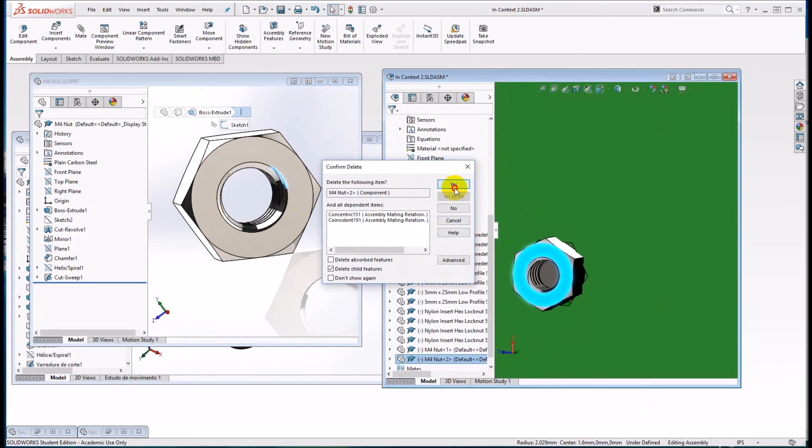This is kind of par for the course. Let's grab that nice big edge right there and find the spot. There it is—now it's in the hole but not oriented, and we'll do that in a moment. Same thing again. Notice it gives me options, and only one of them is correct—that's the right one right there. When you're at the right spot, release.

Can take a moment to find it. There we go, all right, good. So now all of those nuts are in, and they're all in the wrong orientation—we'll fix that.

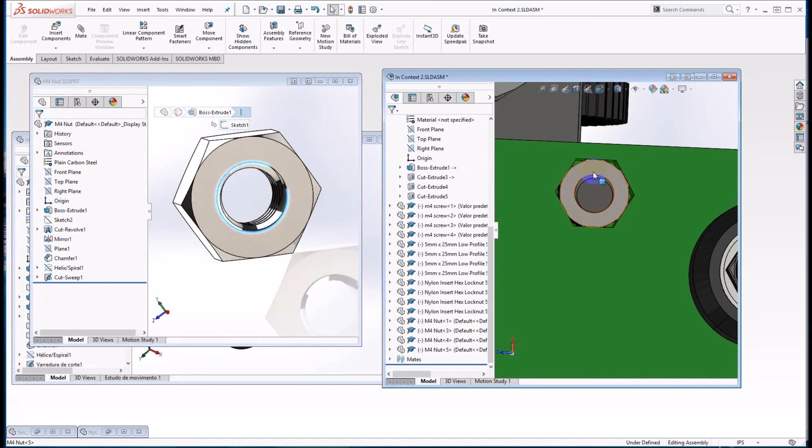Just like any other mating, you look at the area and find surfaces that need to be related to each other. So I'm going to click away from everything, and I'll do a mate of that surface with that. Great—do that 3 more times. This with that, right click. 2 more.

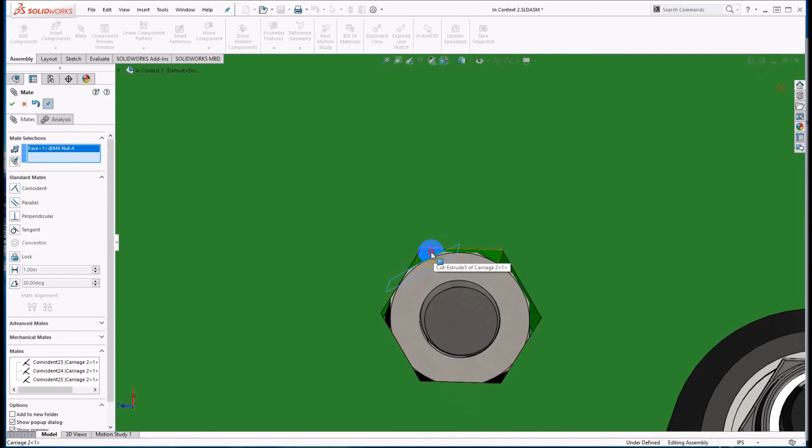That with that, right click, okay. This—oh, I did that wrong, let's clear it. I want that with that. Okay, so now the nuts are embedded.

They're oriented correctly—looks like all my hardware is in place. This is an assembly ready to go. The only thing I need to do now is bring back my V-slot rail. Notice it's shown as hidden. I'll right click on it, show the component, and now it's ready for delivery.

What we're asking of each student is to do a PDF printout of a view similar to what I'm showing right here, and that's what we want you to submit.

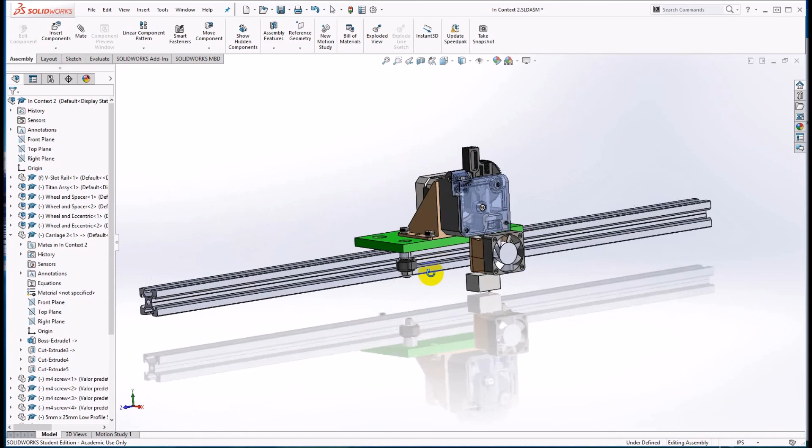Let's get yourself oriented about like this, and let's first do a file save, and then we'll do a file save as, with the file type being—if you scroll down a little bit, let's find it—Adobe Portable Document Format, right there. I do want to view it after saving. So I save it, and there it is—that's a PDF ready for submittal.

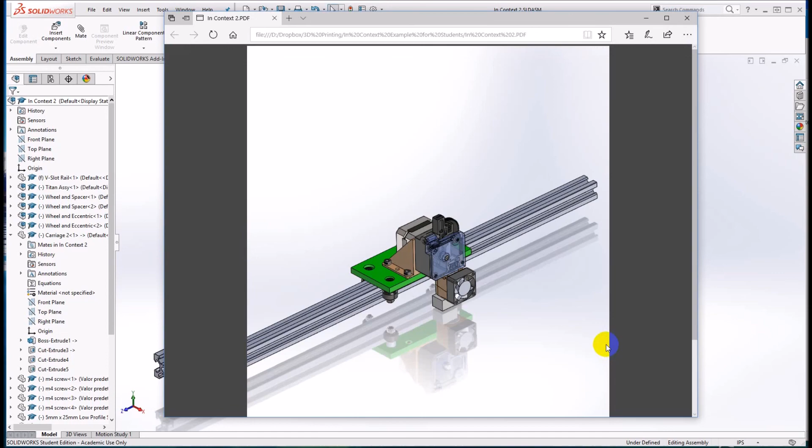That's the conclusion of this lab. I hope you enjoy it, and feel free, as I said, to ask any questions if you have difficulty.